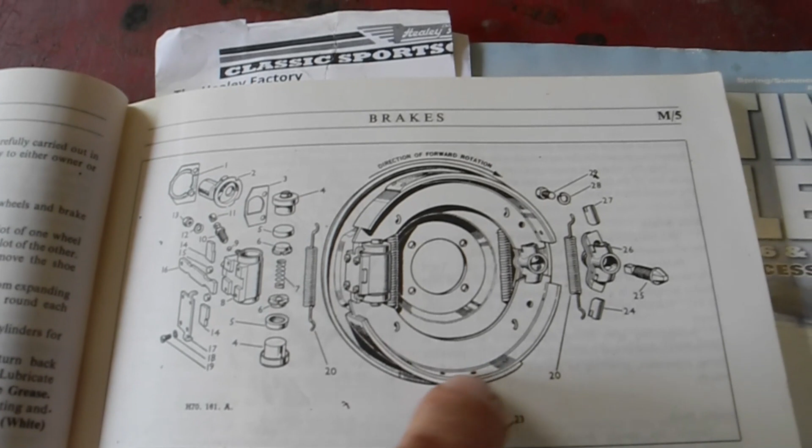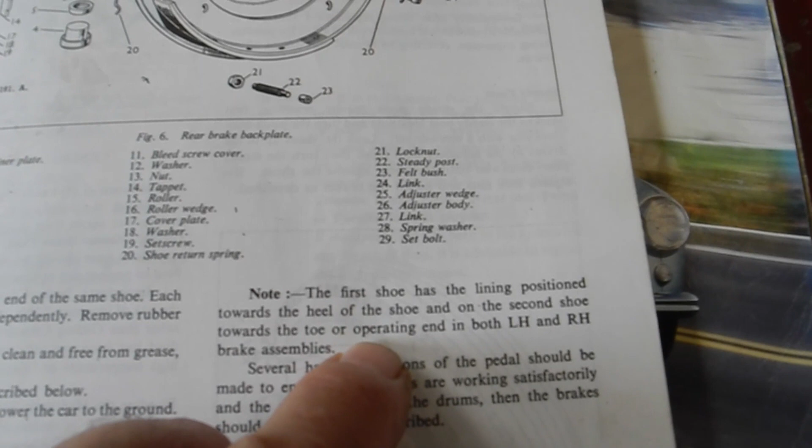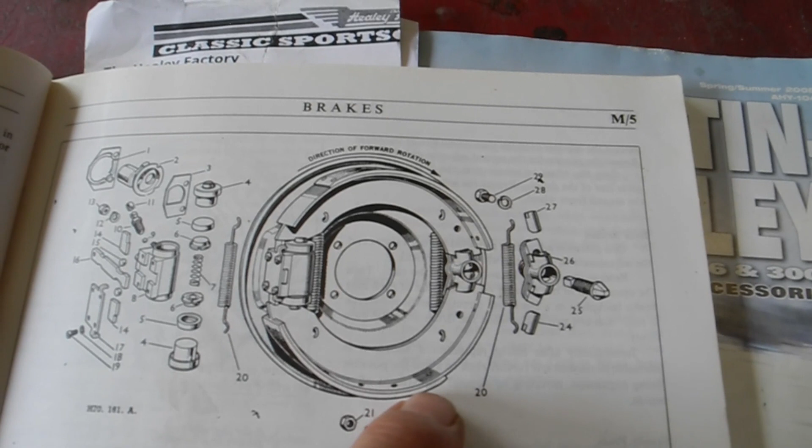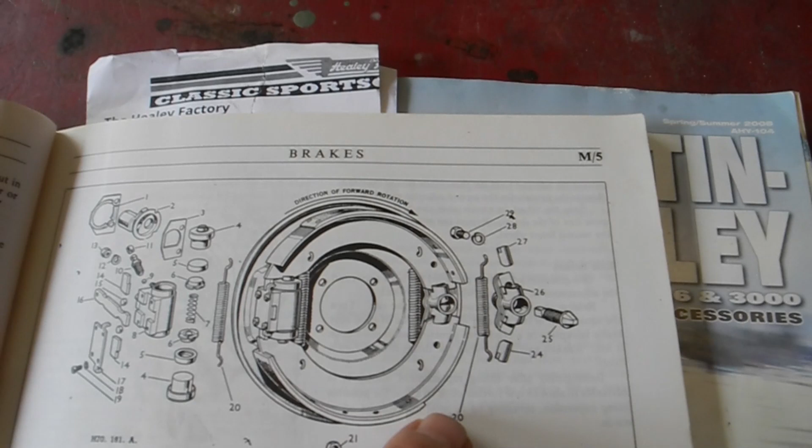Now that's all taken up with this little paragraph here, don't know if you can read that, but essentially that little three-line note in a small book tells you what you should do. So you can see that the first shoe has the lining position towards the heel.

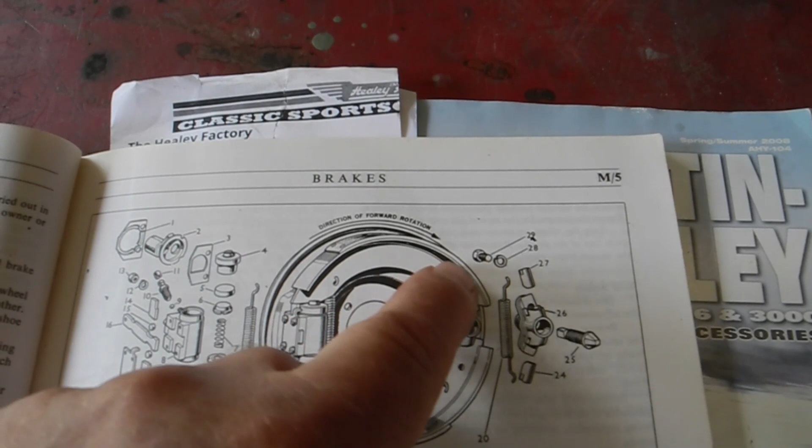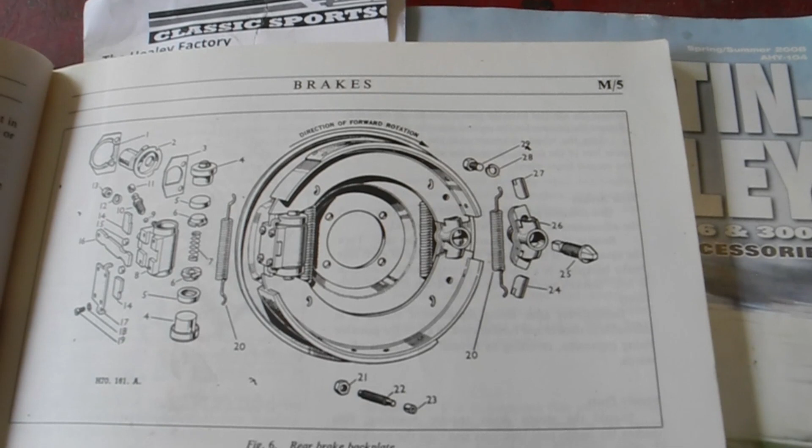And then the second shoe, the lining is towards the toe. Now that's all it says about it. So get it right, preferably first time. Let's hop on the car and have a look at that.

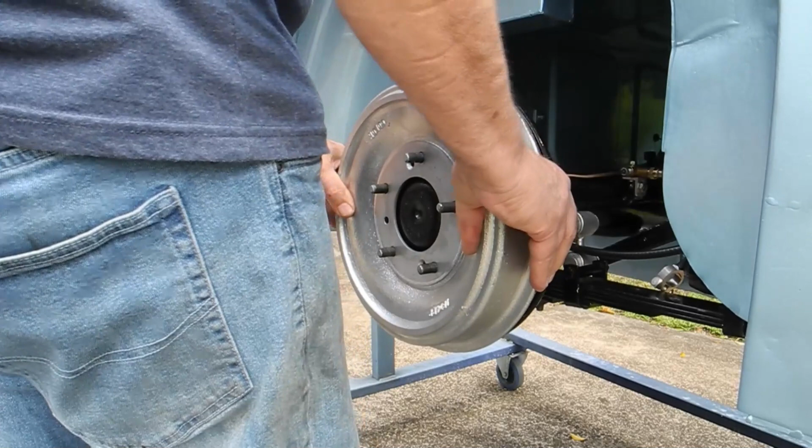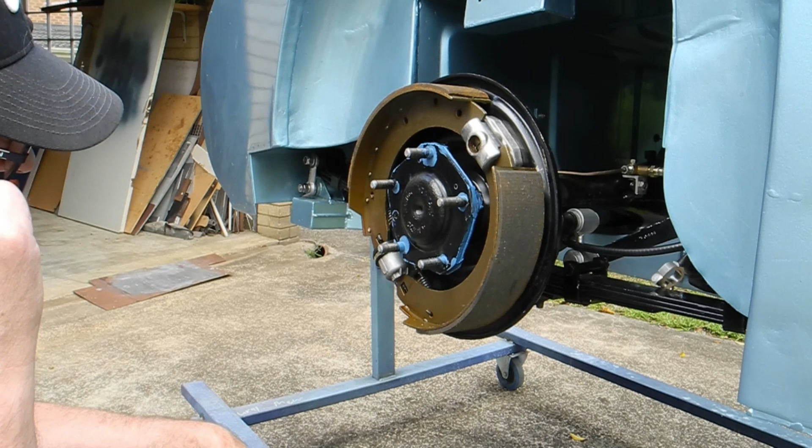Direction of rotation - so the top one is right and the bottom one is wrong. So we need to swap that over. Now that might be a bit painful - getting these springs loose and whatever is quite a process, but let's see how we go.

Just check the book. So that's the toe and that's the heel. It's saying with the first one here, this is wrong. The first shoe should have the heel of the shoe, the lining position towards the heel, so that should be at the back. In other words, I've got to turn it around that way.

Let's see how easy or difficult this is, because I did this quite some time ago. Let's see what we can do.

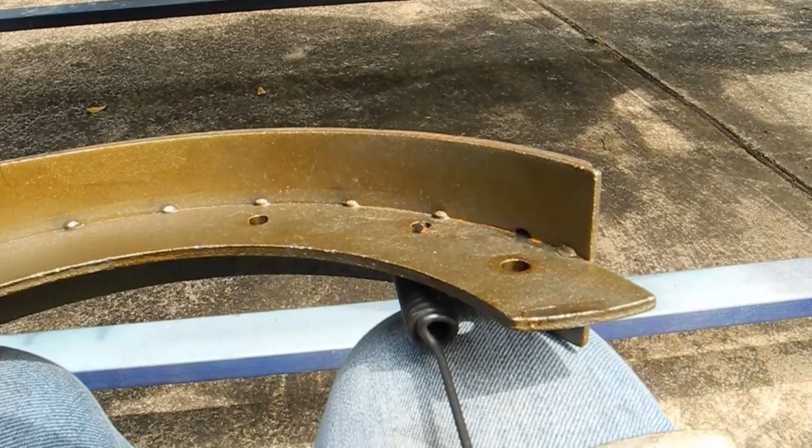Hold it onto my lap for the moment, just so we can see what's going on. I just got to unlatch that spring there, which is not an easy job, so I might take it in on the bench. I'll just stop there for a moment.

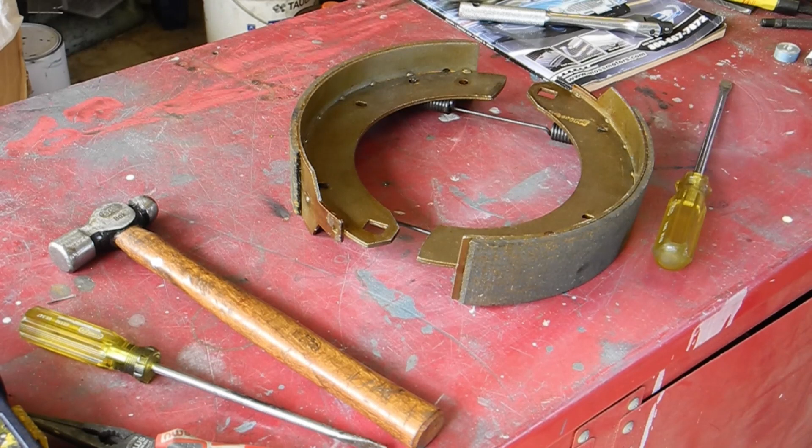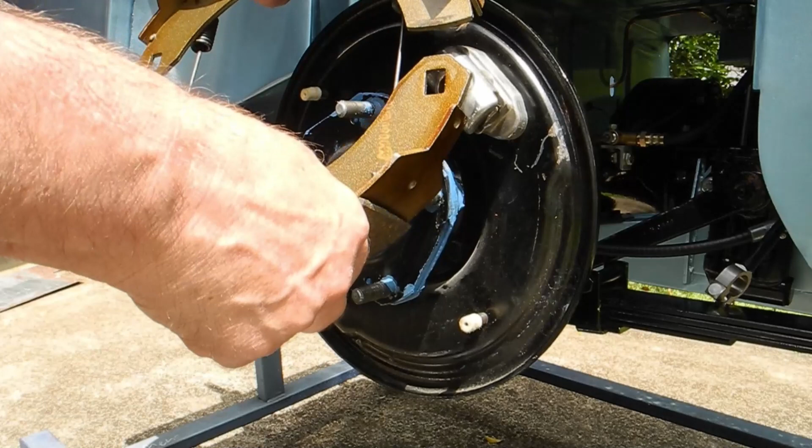Okay, so here we are. Top one's in, pretty much. Now let's stretch the spring, see if we can... Like so. I think that's right.

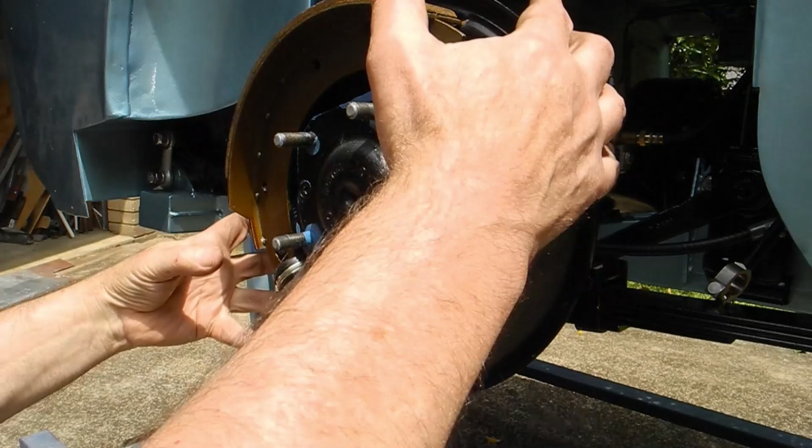That doesn't look right, you see what I'm saying? The angle's like that, whereas it should be sitting level, and I'm wondering if this whole thing is one hole round from where it should be. Now that's interesting, I have to think about that, or whether it's at all relevant to anything.

There's 4 bolts, so if I turn it, it'll go 90 degrees - it would go too far the other way. Let's do the handbrake up and see what happens. The handbrake's just operating, pulling this shoe up, which is fine.

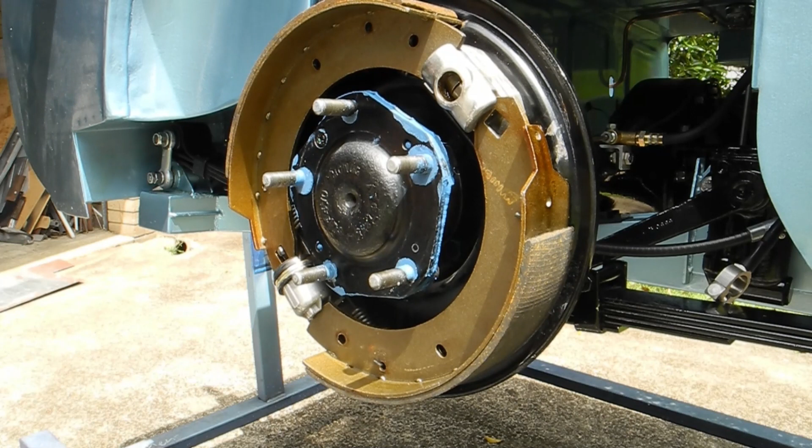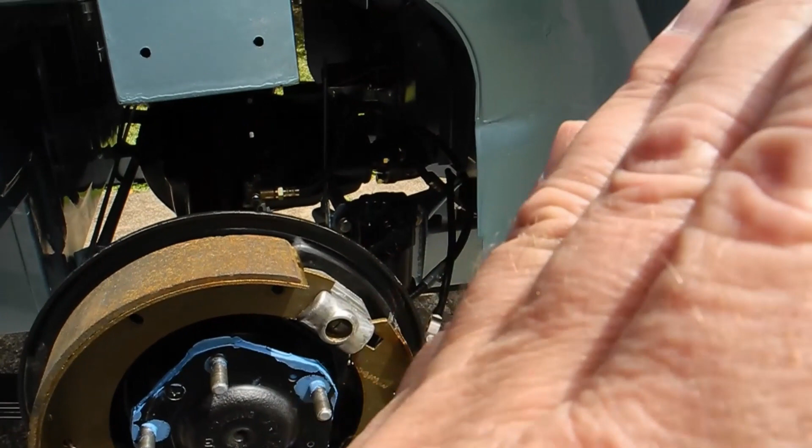No, it's got to be right, because... okay, it's got to be right. Can you see what I'm saying? It's at that sort of angle, whereas the book shows it more flat. I don't know that that's relevant.

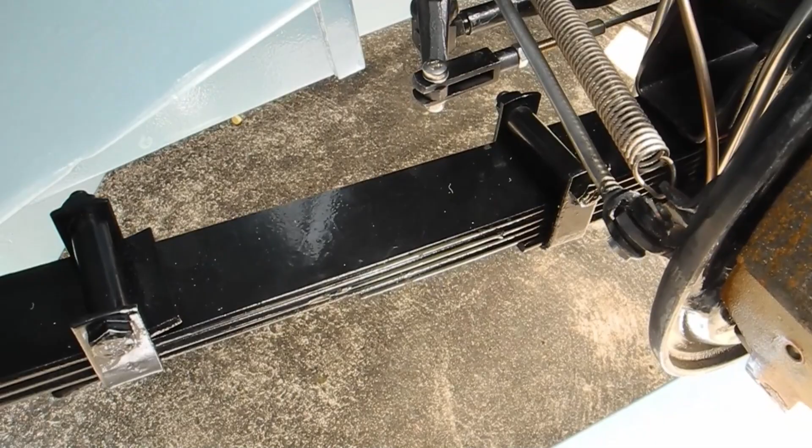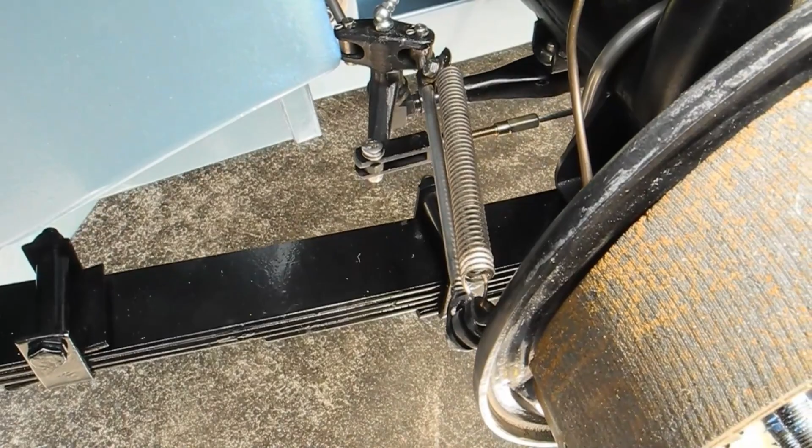However, all the handbrake paraphernalia at the back looks where it should be, because if I take that up one notch, or about 90 degrees, then all my handbrake stuff is going to misalign. So I guess that's it. That's got to be right.

I will check that, because I'm actually a little bit confused about it, but it's got to be right, because I can't pull the handbrake mechanism around more, so that's sitting correctly. Everything else looks fine, so let's assume that if I did that, it'd be sitting 90 degrees off, because there's only 4 bolts, so I'd have to take it to the next step, which is not right. Okay, that's it.

Let's go back to the book one last time. Now the other side, I'm not going to bore you with it, you saw how fiddly it is. So let me see - the first shoe has the lining positioned towards the heel, the back, rotation. And on the second shoe, towards the toe. There's the toe, heel, toe, heel.

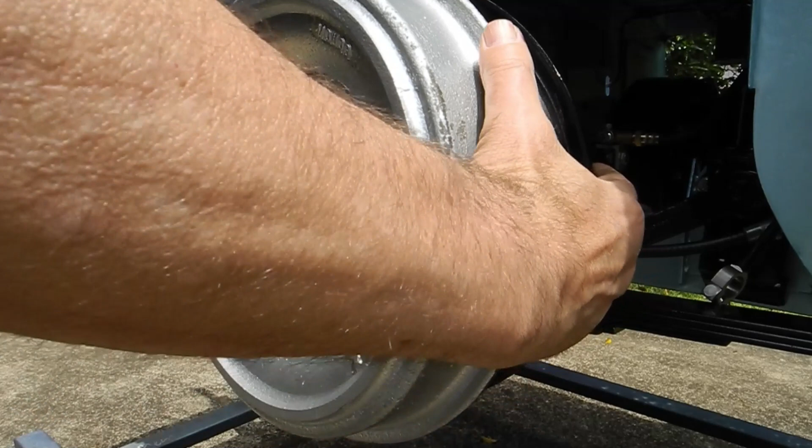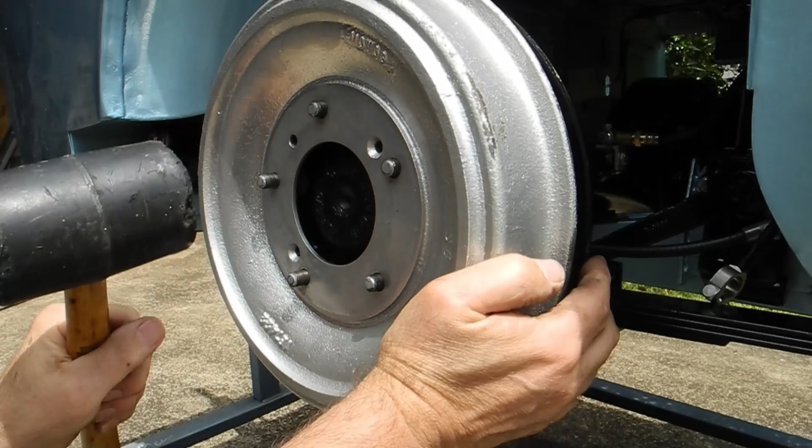Let's make sure everything's all right there. That's the prop shaft just dragging.

So check the other side - it'll be the same issue, and let's call that quits on that. So won't bore you with the rest of the detail. It's just a matter of repeating the process.